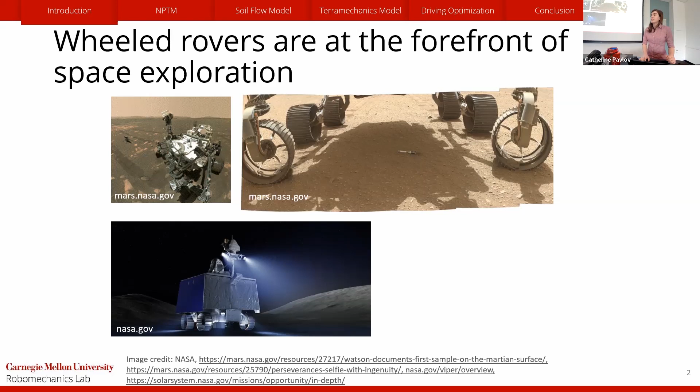You can see here on the lower left is an image of VIPER, the Volatiles Investigating Polar Exploration Rover. This is a rover that will be launching to the lunar surface in 2024, searching for signs of water and other volatiles necessary for a sustained human presence on the moon. So upcoming mission, very cool. And if we look to the past, wheeled rovers have really driven a lot of our scientific discoveries in the solar system. This is a picture of either Spirit or Opportunity. They're identical, so I can't really tell you which one it is. And they have driven a huge amount of our knowledge about how the solar system works.

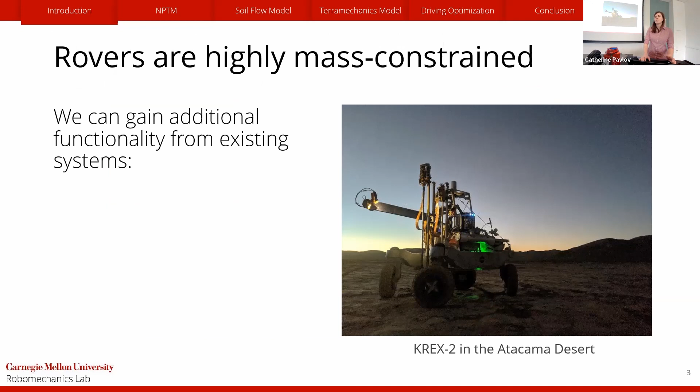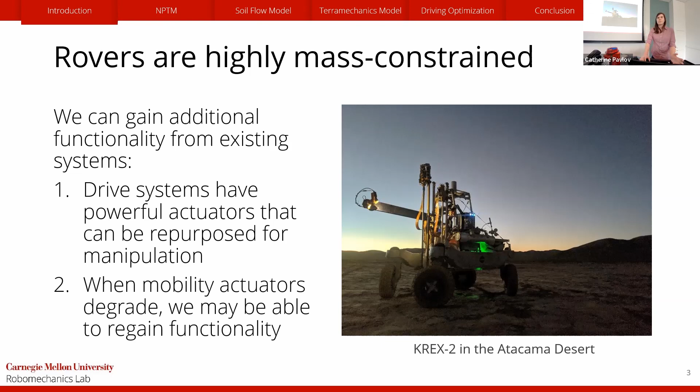One of the drawbacks to any space mission, but especially looking at rovers, is that they're very highly mass constrained. So if we can get any kind of additional functionality out of existing systems on those rovers without building new mechanisms, that's extremely useful. There's 2 key areas that we can look at here. The first is that our drive systems often have very powerful actuators used for locomotion that we can repurpose for manipulation. The second is looking at how we can get back capability when we lose some. When mobility actuators degrade, we might be able to regain some amount of functionality, because generally they'll have more capability to provide force than is explicitly needed for driving. And if we change how we're controlling things, we can get some back in the case of damage.

So let's talk more about manipulation. First up, I'm talking about non-prehensile manipulation today. Non-prehensile just means non-grasping. It doesn't require a dedicated manipulator necessarily. So it can involve pushing, rolling, or any other non-force closure contact. You can see in the video here, this was taken by Dr. Jennifer King, who did some previous work using the frame of a rover to push around cardboard boxes. So she's using the rover here to do rearrangement planning, doing non-prehensile manipulation through pushing. So this is an example of what non-prehensile can look like applied to a rover.

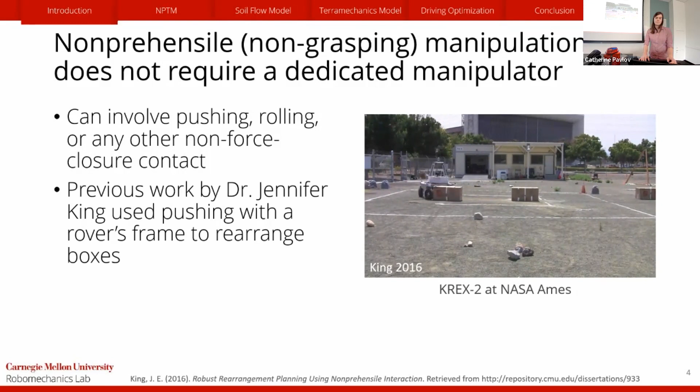Mars rovers have also used their wheels to interact with terrain already. Both Spirit and Opportunity created small trenches or wheel scuffs in the dirt, but this was done in a largely ad hoc manner, where the rover's manipulation was hand tested and pre-planned and done in a small amount, but it was just trial and error on Earth, replicate on hardware in situ. There wasn't a huge amount of planning. If we wanted to do larger scale manipulations, we need to move beyond that.

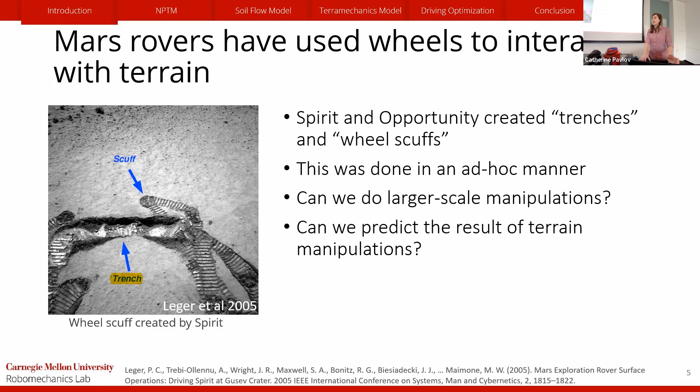So this is a pretty small wheel scuff. You can see it's less than the length of the rover body, just based on the width of the wheel. And it's good for looking at a specific sampling location. But if we wanted to sample over larger regions, it's maybe not as helpful. We'd also like to be able to predict the results of these terrain manipulations. Rather than just dragging a wheel and seeing what happens, we might want to dig to a specified depth, or at least know that we're not going to get stuck when we do this.

If we're looking at applying this to upcoming missions, one to look at in particular is VIPER. The VIPER rover has a 4-wheeled active suspension, which is potentially higher risk. Rather than a 6-wheeled passive suspension like Spirit, Opportunity, Curiosity, and Perseverance have, VIPER has only 4 wheels, but each of them is able to lift up and down. So we have additional actuation there. So we've got now 12 motors, but if any one of them fails, it's potentially a higher impact because now it's impacting a quarter of our thrust-giving wheels rather than only a 1/6.

We also need to consider that future rovers are going to have longer mission durations. For example, the NASA Decadal survey called for Endurance-A, a mission that will have a rover traverse 1,000 kilometers on a lunar surface. For context, the longest a rover has driven is Opportunity, which went under 50 kilometers in 14 years. So going from 50 kilometers to 1,000 kilometers is going to require a paradigm shift in how we think about rover mobility. And as a part of that, we're going to need to plan for failure. We can't just say, we'll drive as far as we want, we'll design this thing to last for 90 days, and if it goes longer, great, if it dies, whatever. We really need to bake into our mission planning what we are going to do when something breaks, because it's going to happen over a distance that long.

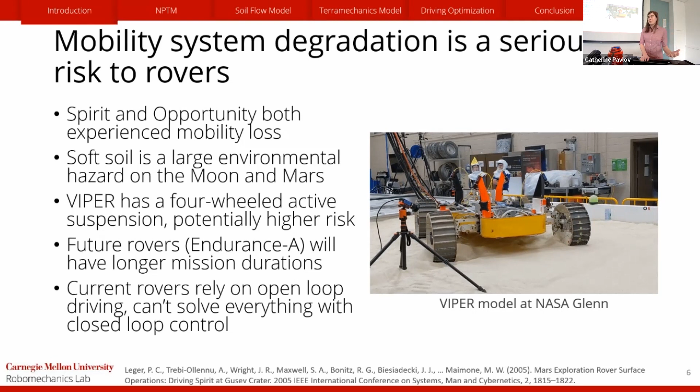Additionally, current rovers rely on open loop driving. Both Curiosity and Perseverance only do visual odometry about every meter to check whether they're slipping or not. So they're not doing online visual odometry, which means that you need to have good, reliable open loop driving strategies. You can't just close the loop to fix everything. Having good open loop driving strategies requires a strong knowledge of your wheel terrain interaction. So failure is a really big problem. Can we do anything about it? The good news is yes.

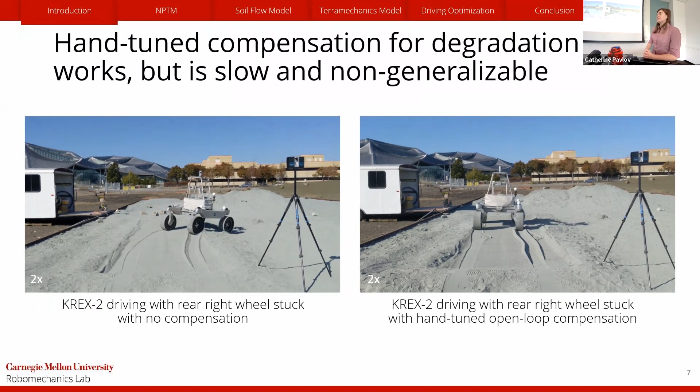This video here is one I took of KREX-2 at the NASA Ames Roverscape. Here I have fixed K-REX's rear right wheel so that it's non-rotating, as if it had a rock jam or something else causing it to not rotate. You can see on the left that without any compensation, it pretty quickly veers off the track and goes into a ditch. This is a problem. However, with hand-tuned compensation, we're able to drive relatively straight over prepared terrain. But this is hand-tuned, and it took me a couple days of hand-tuning to get this to work reliably.

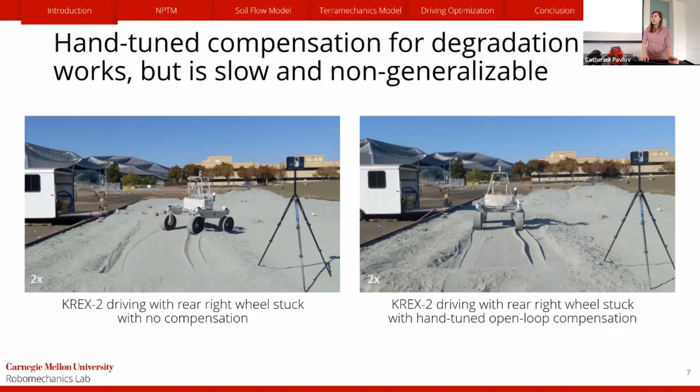So that's not a great solution if we want to be driving thousands of kilometers while we're doing this and potentially encountering different types of terrain where we would have to retune every time we change our soil properties.

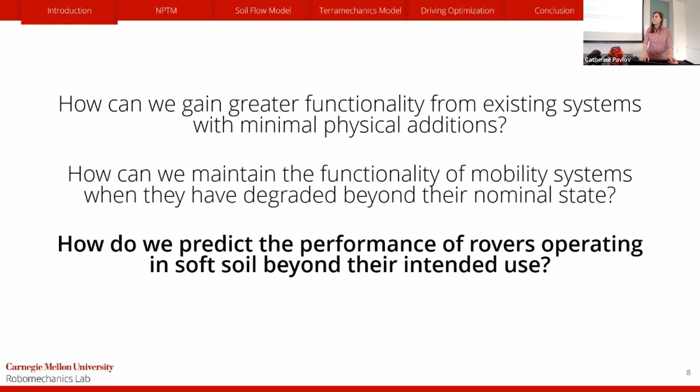So with all this in mind, there's a couple of questions we're going to ask. First up, how can we gain greater functionality from existing systems with minimal physical additions? And we also want to know, how can we maintain the functionality of mobility systems when they've degraded beyond their nominal state? And these two questions really lead into, how do we predict the performance of rovers operating in soft soil beyond their intended use? Whether that's because we have forced them to be beyond their intended use, or they've degraded and the environment is forcing it upon us.

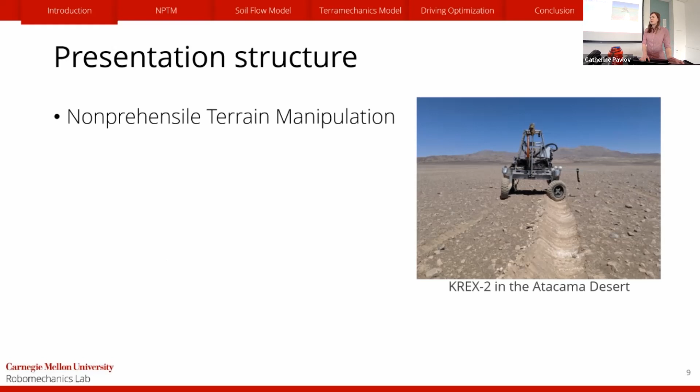So here's what we're going to talk about today. First up, I'll go over non-prehensile terrain manipulation a little more, talk about what that is as a concept and why we care about it and what we're going to do with it here. Then I'll go into a model that I built that describes the soil flow around the wheel of a rover that is driving under off-nominal or nominal conditions. And then I'll talk about a Terramechanics model that I've made that's able to handle off-nominal conditions that no existing Terramechanics models could previously handle.

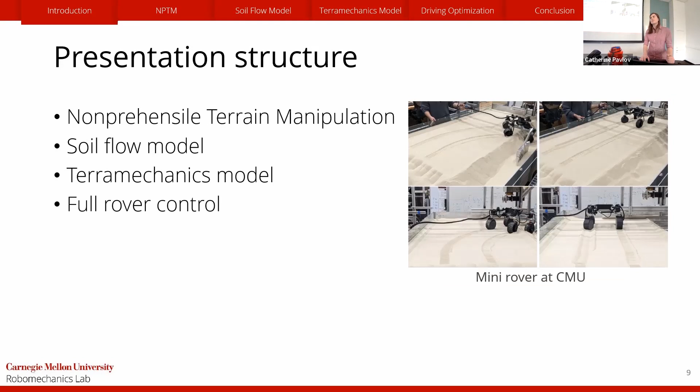Then I'll talk about how we put those all together and develop full rover control strategies for both open loop and closed loop control of driving during off-nominal conditions. And finally, I'll talk about what we've learned so far and what is up next for this area of research.

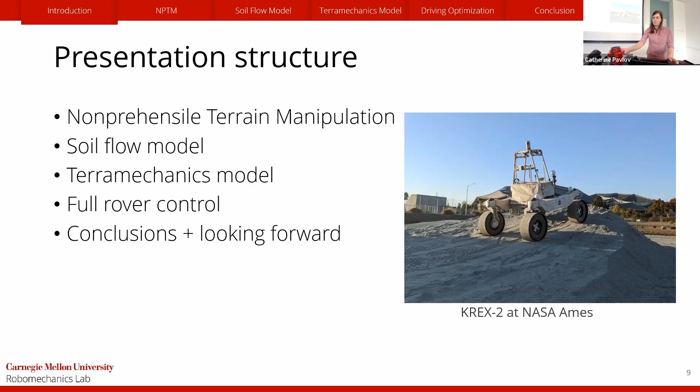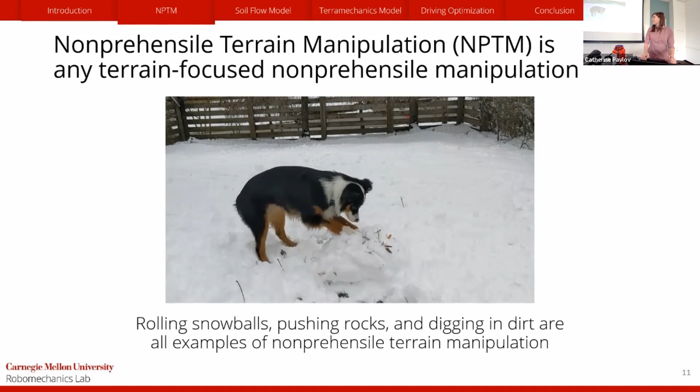First up, let's talk more about non-prehensile terrain manipulation. So non-prehensile terrain manipulation is any terrain-focused non-prehensile manipulation. Could be rolling snowballs like what Millie is doing here, or pushing rocks around or digging in the dirt. Rovers have a variety of uses for non-prehensile terrain manipulation. The first one, and the one I'll talk the most about today, is science, subsurface sampling. It could also use it for mobility.

So you could imagine on a mixed mobility mission that's perhaps longer duration, having more capable but larger rovers carve paths for smaller robots to perform monitoring or other tasks where they might repeatedly be covering an area, and then let the big rover go off and do its important things farther away. Could also envision having the rover alter terrain for itself.

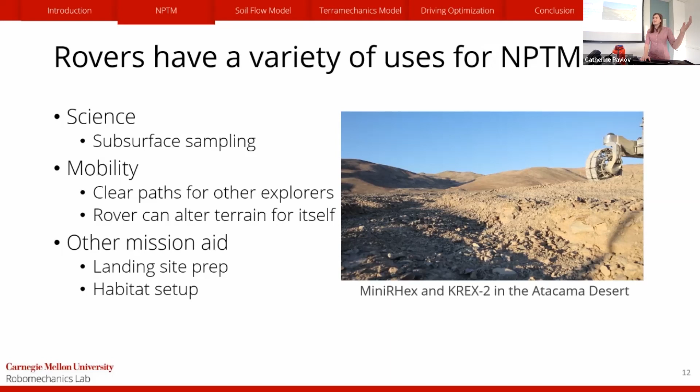We can also use non-prehensile terrain manipulation for other forms of mission aid, such as possibly landing site preparation. Maybe for Mars sample return, we'll have a landing vehicle coming down onto the Martian surface, and we could have a rover prepare the area nearby to where it's been caching samples to make a more level and smooth surface. Could also envision using rovers to help set up habitats for astronauts, perhaps digging trenches to lay cables in as part of habitat construction.

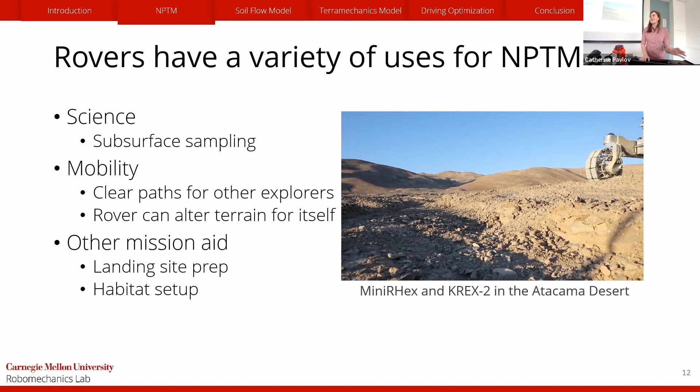So there's a lot of potential things we can do with non-prehensile terrain manipulation, and there's a lot more things to cover than I can do in one PhD. So we're going to focus in on one specific action and zero in on this. We're looking mostly at the trenching action here, where we use a wheel to dig, because it's very useful and it has pretty minimal requirements, so it's achievable. The purpose of trenching is either site mobility, site prep, science, and there's possible extensions to mobility as well, especially science looking at doing subsurface sampling.

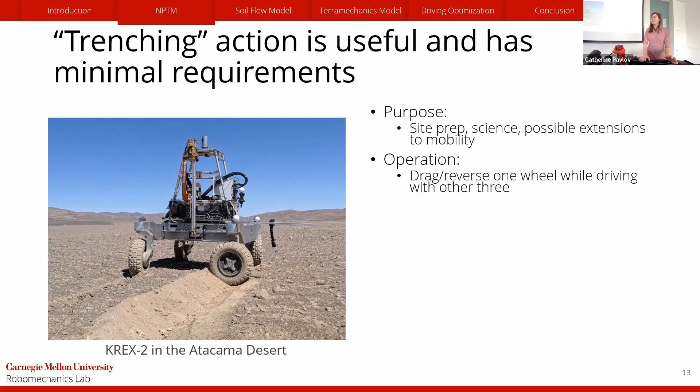The robot operation, or what we need to do physically to control the robot to do this, is to drag, reverse, or spin one wheel at an odd speed while driving with the other three. Our rovers are all capable of doing that. And some potential mission scenarios this can apply to are accessing lower levels of strata for sampling, preparing sites for humans or other robots, such as by digging a trench to lay wires in, like I mentioned earlier.

And our requirements are things that most rovers meet. So we need wheels with steer and drive motors. All of our upcoming and current rovers have that. For sensing, we'd like to have visual depth and orientation sensing to confirm that we've done things correctly. But if we have good enough open loop, we don't need to have these in real time. We'd just like to have them present on our rover. And for the terrain, we want friable soil and small rocks. So soft soil or small rocks. And this describes a large portion of both the lunar and Martian surfaces.

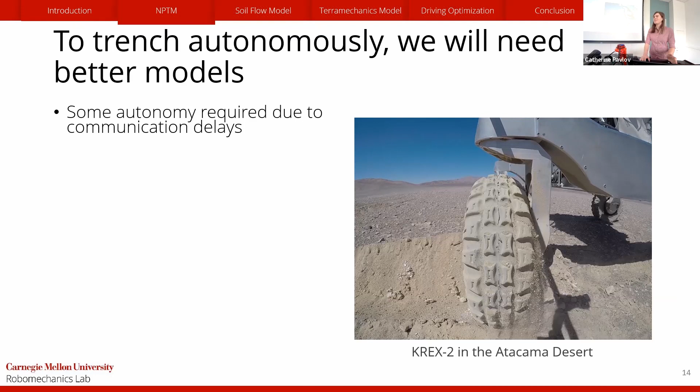We really don't want to get stuck. If we get our car stuck here on Earth, that's okay. You call a friend and they pull you out. If you get your rover stuck on Mars, there's no one to call and pull you out. And it's often end of mission. We don't want to do that.

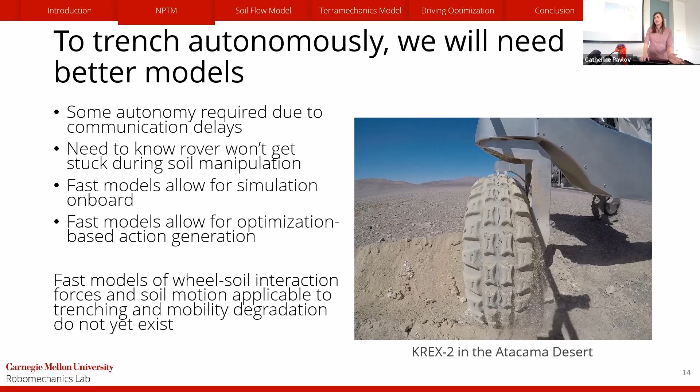We'd also like to have relatively fast models, either so that we can do onboard simulation or so that we can use optimization methods to generate our actions for doing trench digging. However, fast models of wheel-soil interaction, both the forces and the soil motion, that are applicable to both trenching and mobility degradation don't yet exist. So now I will talk about how I made them. First up, we're going to talk about the soil flow model.

There's a couple options in the literature for modeling soil flow. Discrete element models, which use many small particles and model the individual movement of the particles, are pretty common if you want visually realistic simulation. These are extremely slow, and you still need to know a lot about what your particles are like. Finite element methods are a little bit faster. They tend to be mesh-based methods. It's going to be faster, but still pretty slow. Hybrid DEM and FEM methods exist that sort of balance the two in terms of realism and speed.

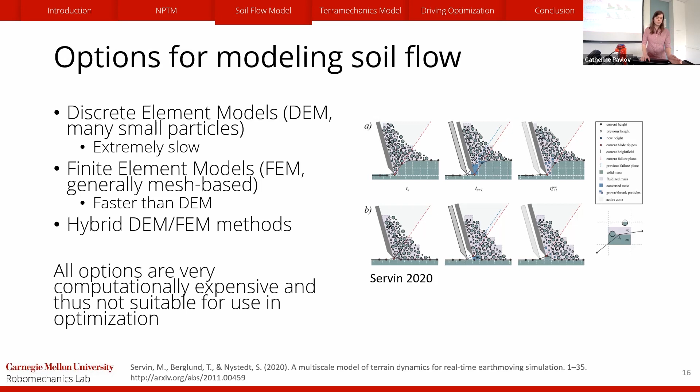But all of these are way more computationally expensive than we'd like, and not something that's really suitable for use in an optimization or in really good online simulation. We also don't care that much about where every grain of sand goes. We want a general overall picture of what the soil looks like. So with that in mind, I developed a 2D closed form model of soil flow based on soil mechanics that describes a couple of distinct trench shapes that we observed by driving a wheel through soil.

This model is based on some key assumptions. We're assuming that all soil moves from the front to the back of the wheel without compaction. That's going to vary by terrain. And if there is some compaction, that will change our model accuracy a bit. And we're going to assume that the soil comes to rest at its angle of repose, the angle of repose being the maximum slope angle for a soft soil. So if you pile up sand and let it fall down, it's going to fall to the same angle every time. That's the angle of repose. It's a pretty easy to extract soil property.

So let's go through how the soil flow model works just briefly. So here we're looking at a wheel from behind. First up, we look at where the wheel is interacting with the soil, and we separate the soil into the portions that are touching the wheel rim and the portions that are touching the wheel face. We separate those out. We'll also additionally, from the wheel rim, take out the soil that is getting caught up in the grousers rather than getting pushed along by the wheel rim, and we'll separate that out for now.

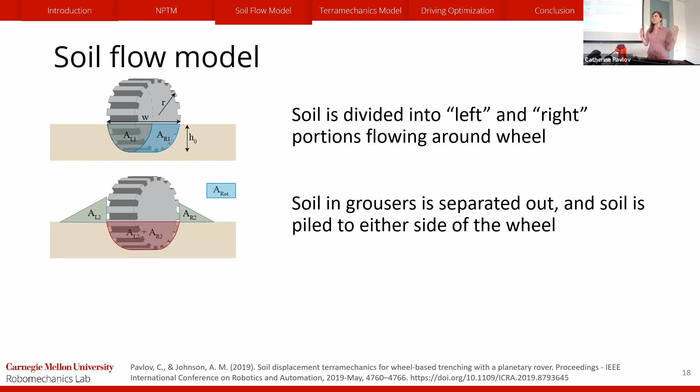We then take the soil that we've had flow around the sides, both around the face and around the wheel rim, and we'll pile it up to either side of the wheel. And then we let those piles reflow back into the trench. We've still got our soil that's separated in the grousers held out for now.

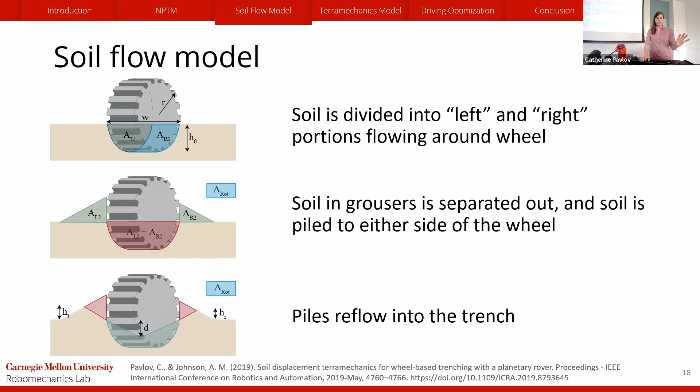Once we've reflowed those piles, we'll check and see if the resultant depth of our trench is physically possible. It may be that in order for us to have a pointy trench, we need to have a trench that's deeper than the bottom of our wheel. That's non-physical. If that's the case, we know that the bottom of our trench is flat, and we recalculate. And then once we've done that, we take the soil that was deposited in the grousers and we dump it back on the trench where it forms a step or a flat bottom.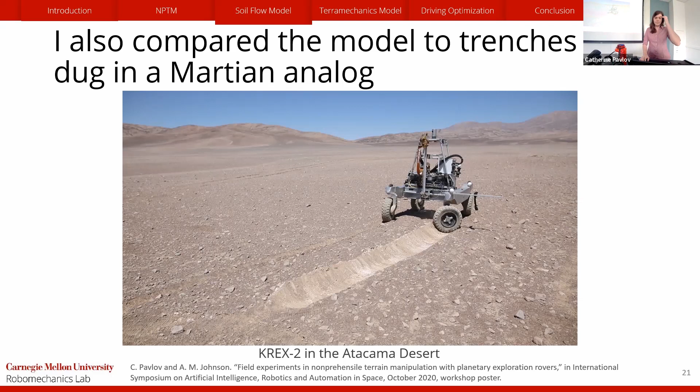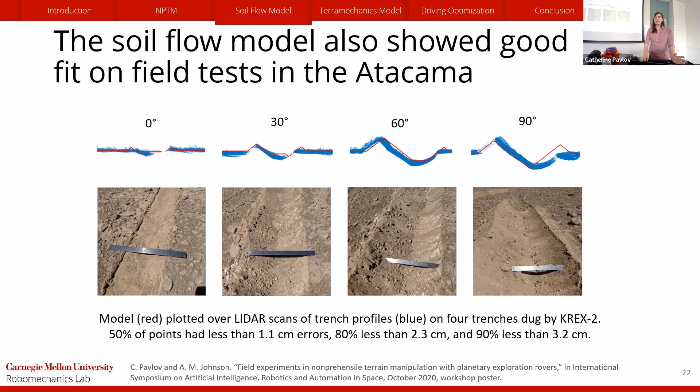So the model also worked well at predicting the shape of these trenches in the field. We were able to measure the soil angle of repose in situ by digging with the wheel and measuring the slope of the resultant soil pile. And based on that, we were able to predict pretty well what the shape of the trench would be. So this works both in the lab and in the real world, and it's extremely fast because it's closed form. But now we need to know about what our wheel-soil interaction forces are. So now we're going to talk about terramechanics.

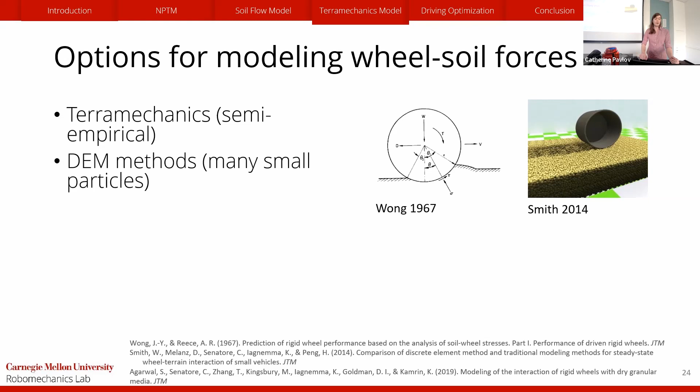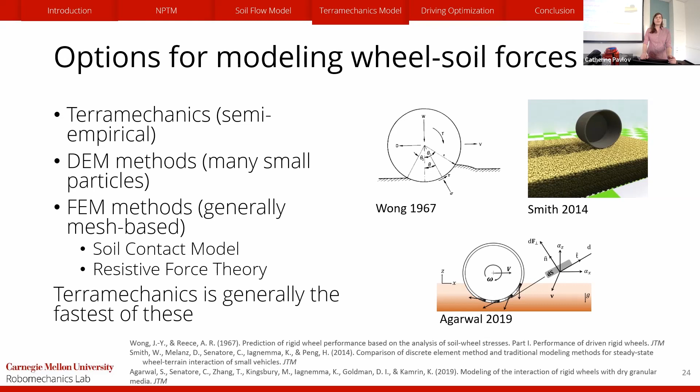There's a couple of options for modeling wheel-soil interaction forces. First up, the one I'll talk most about today is terramechanics, which is a semi-empirical model that uses soil mechanics informed methods to look at the stress distributions under a wheel. There's also, again, discrete element methods like we had for our soil flow modeling, where you look at many small particles, and finite element methods, which are generally mesh-based. These include methods such as soil contact model and resistive force theory, which is inspired by fluid dynamics. Terramechanics is generally the fastest of these, given that we're not simulating individual elements.

So let's talk more about terramechanics. Terramechanics models give forces on the wheel for a specified driving state most of the time. How do we define that driving state? First up, we're going to look at the slip ratio, which I briefly mentioned earlier. The slip ratio is going to describe how our wheel is moving relative to the soil by looking at its rotational speed compared to its translational speed. So we'll be in positive slip if our wheel is spinning faster than it's moving forward, and in negative slip or skid if it's spinning slower than it's moving forward.

Zero slip is the point where the wheel is rotating with its rim speed at the same speed as its translational speed. So when you're driving your car on the freeway, you're at zero slip. When you slam on the brakes, you're in skid or negative slip. And if you're at the stoplight trying to race the person next to you and you slam on the accelerator and your tires spin before you start getting traction, you'll be in positive slip there.

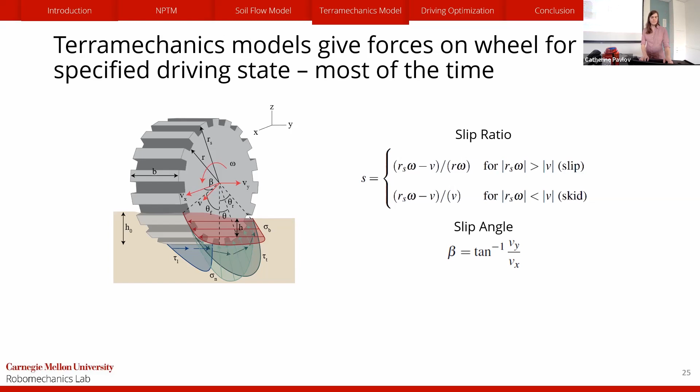We're also going to talk about the slip angle, which is the angle of the wheel relative to the direction of travel. If our rover is driving straight, that's just going to be the angle of the wheel relative to the frame. So for a given slip ratio S and slip angle beta and some known applied load, we can find the stresses on the wheel surfaces and integrate to find the net forces and how far that wheel is sinking into the soil at steady state.

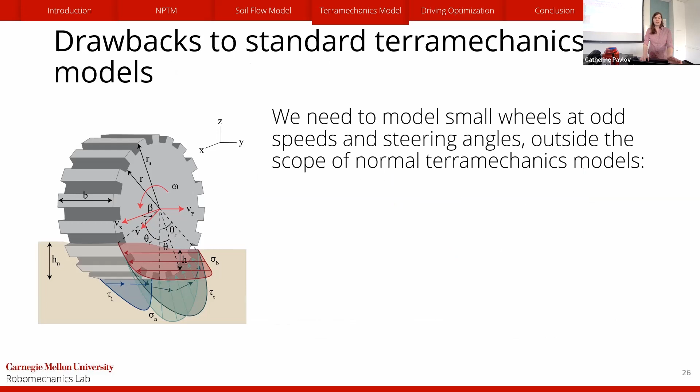It is important to note that terramechanics models are generally steady state. However, there are some drawbacks to the standard models, which I'll be addressing. First up, we need to model small wheels that are at odd speeds and odd steering angles, which is all outside of the scope of normal terramechanics models. So because terramechanics is semi-empirical and we have many tuned variables, it really matters what region we've tested our models in and what region we've verified our models in when we're looking at the state space.

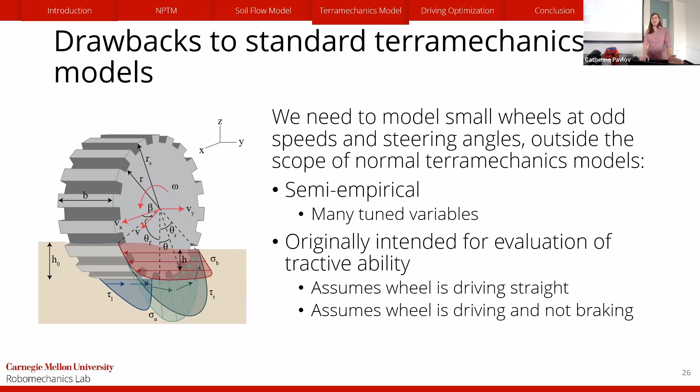Because these models are intended originally for the evaluation of tractive ability, they tend to assume that the wheel is driving straight and usually that it's driving and not braking. So we're in slip, not skid. There has been some exploration of skid, but not as much as slip. And there haven't been any that connect skid and non-zero steering angles. So I've built a new terramechanics model that fixes these problems.

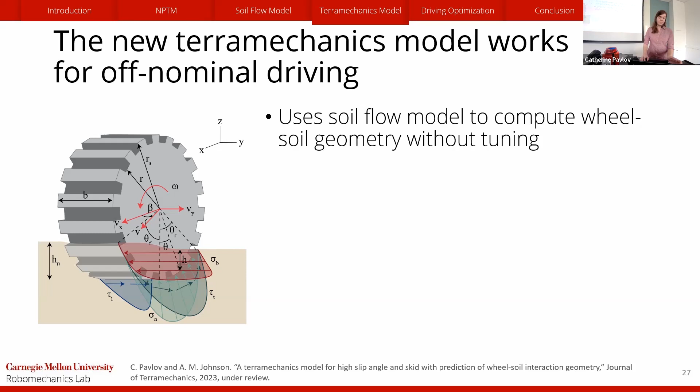First up, one thing we do is we use the soil flow model to compute some of our wheel-soil interaction geometry without tuning. So we're able to use that soil flow model to eliminate some tuning variables, which makes us able to apply it to more conditions without as much tuning. I also combined models that handle slip angles and skid conditions and tested them. No one's ever done this before. There are no papers in the literature that look at skid with a steering angle.

I also modeled the forces on the wheel's face using soil cutting theory. There are existing models that look at steering angle, but the most popular one has a math mistake, so we did it a slightly different way. And I also looked at how to predict tuning variables for different slip angles so that we can take this model and continuously apply it to any wheel state. So I'll talk briefly about how we can use the soil flow model to get our wheel-soil contact geometry.

So here we can see the wheel viewed from the front. And you can see we've got our soil surface here. And there's a couple of angles here that are going to define how our wheel is in contact with the soil. So we define our contact points by their angular location on the wheel's surface, where theta F is our front angle. It's largely determined by the sinkage. And theta R is our rear angle, which is where the back of the wheel loses contact with the terrain.

And historically, that value has been either just straight up measured or tuned based on trying to fit the model better. However, we can do better. We've got a soil flow model. So here you can see the wheel viewed from behind now. And we've already executed our soil flow model to get this profile. And what we can do is look at the part of the profile that's in contact with the wheel's rear rim and take a weighted average to find out what angle the wheel is contacting the soil at.

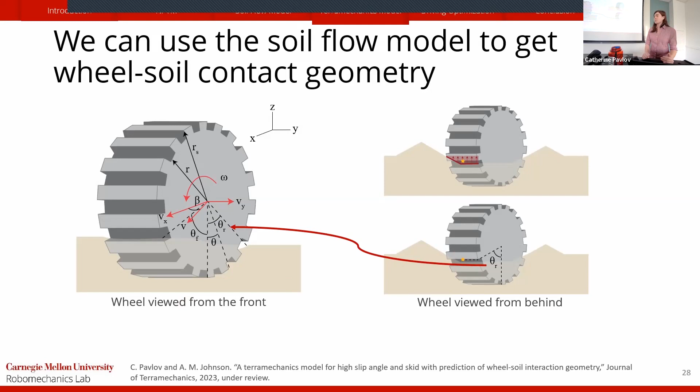And we can directly extract that angle. And so now we don't have to tune this exit angle. We don't have to tune our wheel-soil contact geometry, and we can just directly predict it and use that in our model. And because the soil flow model is closed form, this isn't going to add to our computation time.

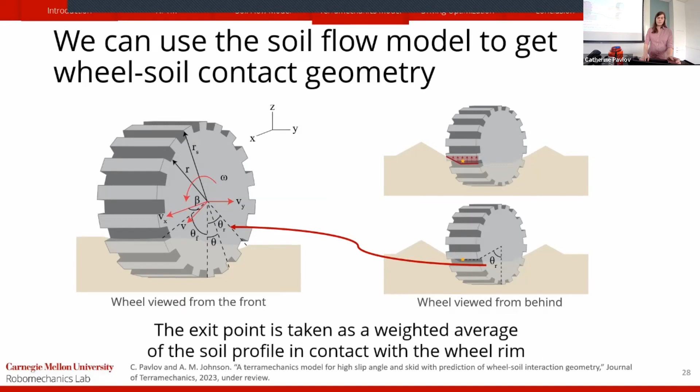So we built this great model. How do we know it works? So due to the pandemic, I was unable to go borrow a terramechanics test bed to test this, and I built one myself. So in this test bed, the wheel is driven at a selected travel speed, rotational speed, and angle. The wheel is free to translate vertically, and we measure the sinkage. So we've got a constant load applied to it in the form of a constant weight with free vertical translation.

There's a force torque sensor mounted above the wheel, which will be a little easier to see on the next slide. And we're using the same soil as we used for both our soil flow model tests, and that we'll use in some tests later as well.

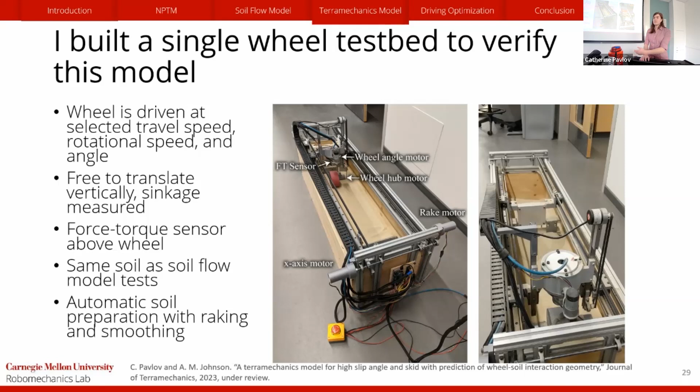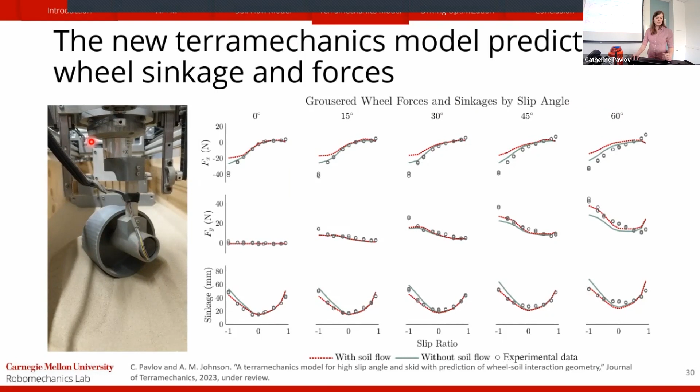And this also has automatic soil preparation with both raking and smoothing of the soil surface, so we have an even and consistently prepared soil bed. You can see on the left here is a wheel doing a run. Mounted above it is the force torque sensor here that's measuring our vertical load, so we know how much force is really being applied, and also measuring our forward and sideways forces.

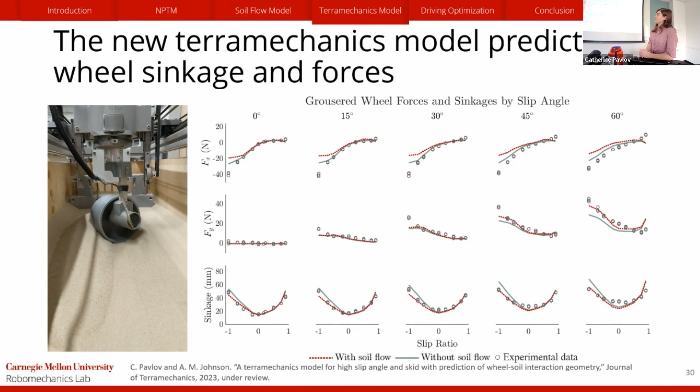And you can see that it is digging into the soil pretty deeply here, driving at a relatively high slip angle. As you can see on the right, we had pretty good fit from the Terramechanics model for predicting both the X and Y forces on the wheel, as well as predicting the wheel's sinkage. I've shown here the same model, both with the soil flow prediction of the exit angle and without the soil flow prediction of the exit angle, using the classic method of just tuning that exit angle to make the forces fit as best as possible.

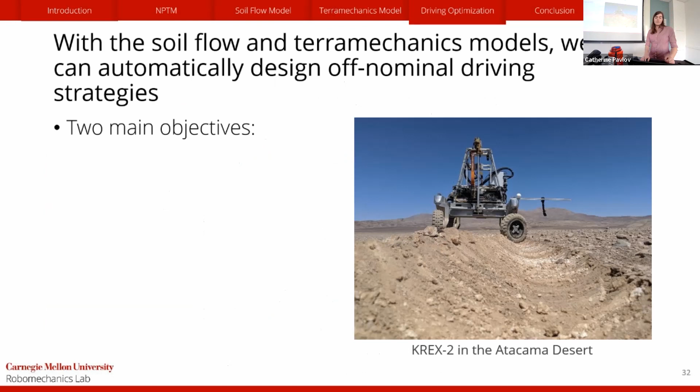So now we've got these models, what can we do with them? So with the soil flow and Terramechanics models, we now have the tools that we need to automatically design off-nominal driving strategies. There's two main objectives. One is to generate trenching actions automatically, and the other is to compensate for wheel failure. We can use the same approach to both problems.

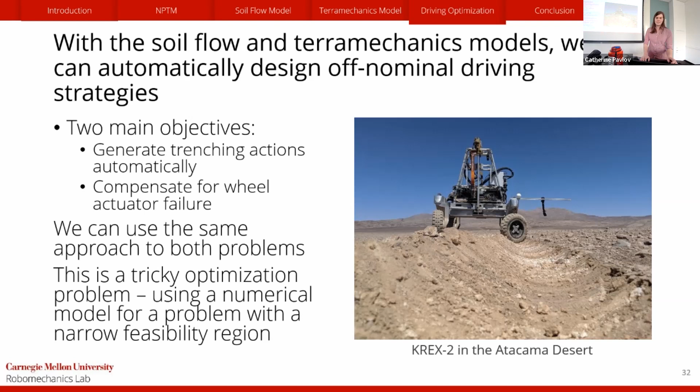I will say that setting this up as an optimization problem is tricky. We're using a numerical model for a problem with a pretty narrow feasibility region. I won't get into the dirty details, but suffice to say, it's more than just fmincon solve this problem for me. So here's how we would use an optimization-based method to generate trench actions. Our decision variables are going to be the rotational speed, the slip angle, the vertical load, and the sinkage for every wheel independently. So we've got 16 variables.

And our constraints, first off, are going to be that our forces and moments on the entire rover sum to 0. So we want our rover to be driving at steady state because we want this to be an open loop action that we can perform and have the rover drive at a constant heading. So we need all the forces and moments to balance to zero. We also want to make sure that the vertical load matches the force predicted from the selected sinkage.

Note that I've had the vertical load and the sinkage be both decision variables. This allows us to avoid having to do an internal loop in our Terramechanics model to perform finding of the sinkage. Normally we do that by having binary search over sinkage until our applied load matches our predicted vertical load. But if you do that in an optimization, you're going to have a bad time. So we avoid doing that entirely and set that as a constraint and let the optimization do the sinkage finding for us.

Then we want to think about what we want our trench to look like. So for the trench that I wanted to dig, I wanted to have a clean edge, which is to say I wanted the soil piled all to one side and completely transported from one side to the other so that we have an area where no soil has reflowed into the trench. And I wanted some minimum dimensions. So I wanted the trench to be at least 2.5 centimeters deep so we could get a look at it.

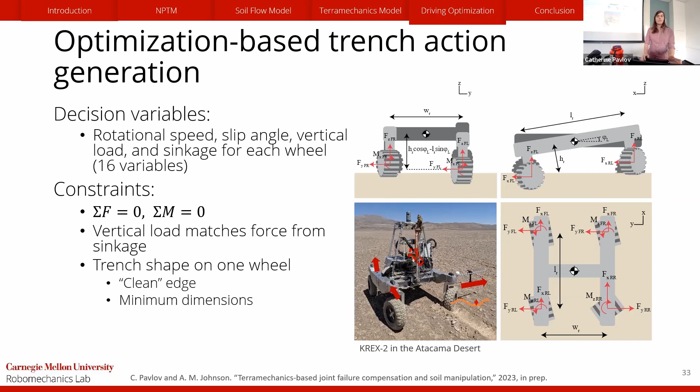The cost function, since this is an optimization, is going to be trying to minimize our power consumption. There are, of course, an infinite number of possible ways to solve for force balance and solve these constraints, and a lot of them are going to be absolutely bonkers and have the wheels spinning crazy fast and working against each other. By minimizing the power consumption, we can counter that. So that'll generate us a feed-forward, or open-loop, action.

If we want to develop closed-loop control, we can do a very similar approach. So our decision variables, costs, and constraints are going to be the same, except that for controlling our yaw angle, we'll offset our yaw moment balance by a small amount. And for controlling our horizontal position, we'll offset the y force balance by a small amount.

You could use the same approach to generate controllers that'll keep you at a constant speed by offsetting the x force, etc. But I focused on those two because I was mostly concerned with how do we drive straight. You then run the optimization separately for each controller, and you subtract out the feed forward driving variables in order to get a steering controller.

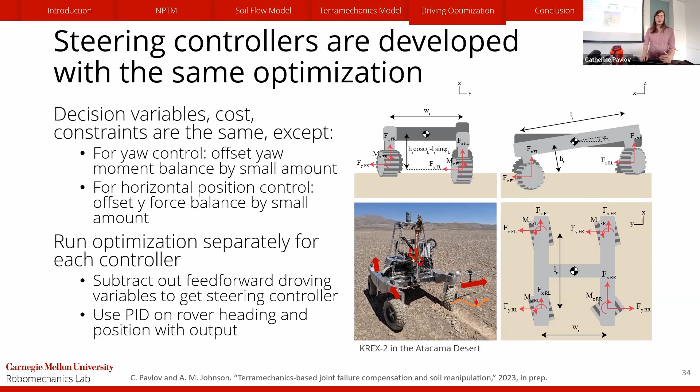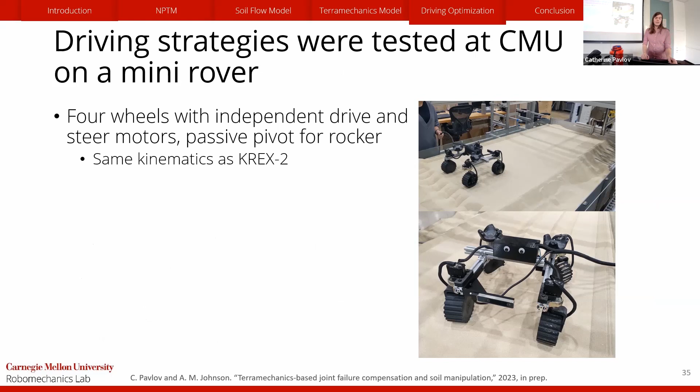You can then use PID on the rover heading and position with output to force your rover to drive straight. So after generating these trenching strategies, I tested them at CMU in one of David Wettergreen's test beds on a mini rover that I built. This rover has 4 wheels with independent drive and steering motors and a passive pivot for the 2 rockers. So it's got the same kinematics as KREX-2.

It's got a RealSense T265 mounted to the front for measuring rover pose. And it's got the same soil preparation and same soil as the Terramechanics and soil flow model tests. We've got about a 1 meter by 2 meter area to work with, so there's room for it to drive. This rover is about the size of a microwave, so it's pretty small compared to KREX-2, which was about the size of a golf cart. This has the same wheels as our Terramechanics tests, which is great because we've tuned our models for them.

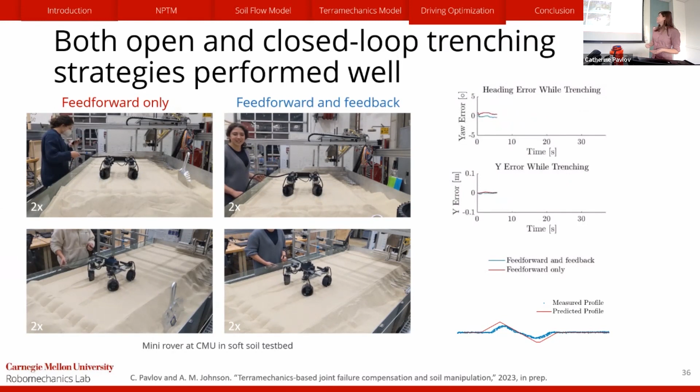So first off, for trenching, our open and closed loop strategies both worked well. You can see on the left, we have our open loop or feed forward only trench digging strategy. And on the right, we have that feed forward term, also with the feedback controls I described in a previous slide. And you can see that for all of these, the rover is driving straight. You can see the yaw error and y error on the right.

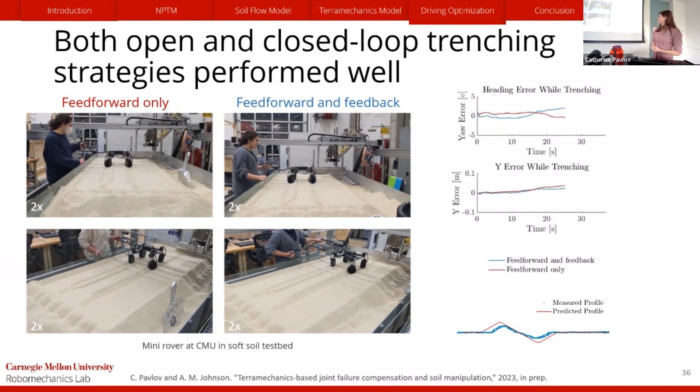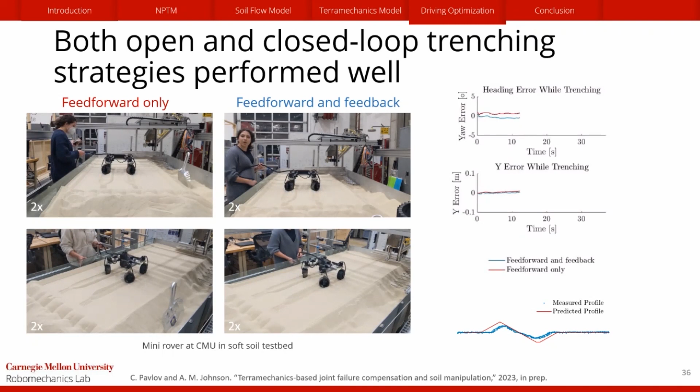They're staying pretty small. Our yaw error is at most like 1 or 2 degrees, and our y error is very small. And you can see on the lower right, the shape of the trench we dug, a laser scan of it compared to the shape we expected. Our sinkage was a little bit lower than predicted, but the overall shape was correct.

All right, we can also use this same optimization strategy to compensate for actuator failure. We're going to have our same decision variables, our rotational speed, our slip angle, our vertical load, and our sinkage for each wheel. So 16 variables again. And the constraints are going to start off the same. We want the same force and moment balance to sum to 0. Once again, we're making the optimization do sinkage finding for us so we can avoid doing that internal loop. But now, instead of having trench constraints, we're going to have our broken actuator constraints.

So I'm going to look at 2 different potential modes of failure here. There are so many ways a rover can break, but I only had time to test 2. So first up, we've got a stuck steering angle, as if the rover's steering joint has gotten stuck in the middle of performing a turn or something. This did happen to Spirit. It got one of its steering motors stuck at an angle. And then we're going to look at a speed limited wheel. So here I'm going to set that the rear right wheel is only able to rotate at most half the speed of its intended travel speed.

Now you could just slow down the whole rover, but let's say we're trying to cover 1,000 kilometers in less than 50 years, and we'd like to go fast. We want to know, can we go fast with this wheel? Maybe it just needs to recirculate lubricant for a bit and we have to run it slower for a bit. Or do we absolutely have to go slower? And once again, we're going to minimize power consumption as our cost.

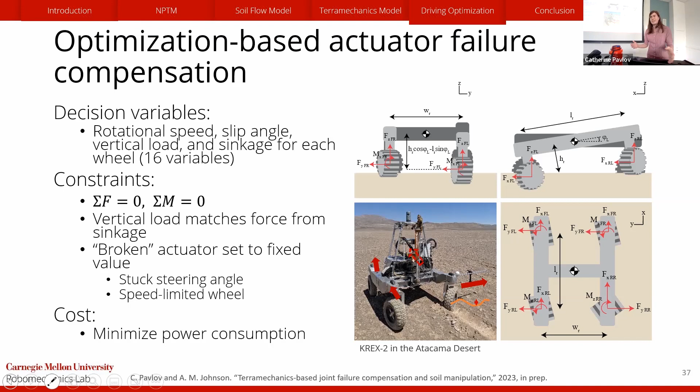You could imagine adding in other constraints as well, such as if you said, oh, we know that doing this kind of thing is going to put a lot of stress on one of the supports for our wheel. You can do things like set constraints limiting forces, internal forces on the rover, etc. I wasn't worried about that here, so I didn't include those, but you absolutely can.

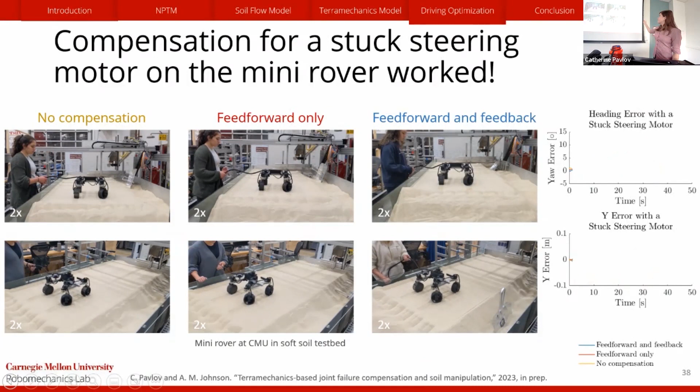So compensation for stuck steering on the mini rover worked. On the left, you can see the rover driving with a stuck steer motor with no compensation. You can see it as the yellow track on the right over here, where it veers way off to the side. In the center, you can see our feed forward only turn, where the rover has far less error in the Y direction. It does have some yaw error now though, so this one's not quite perfect. And with both feed forward and feedback control, we're able to drive completely straight. That's the blue track.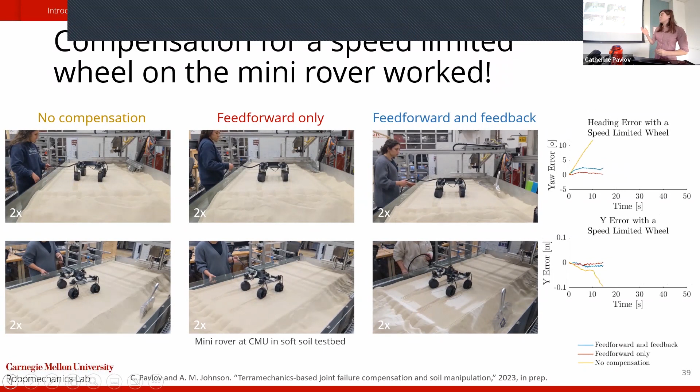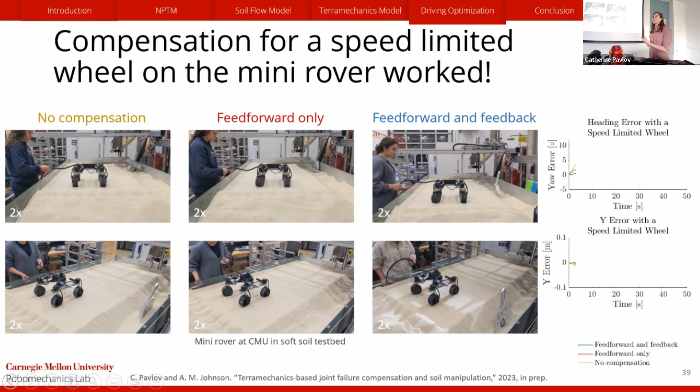Compensation for a wheel with a speed limit on the rear right wheel worked really well as well. You can see here, again, on the left, we have our fully uncompensated rover, and you'll see that it immediately starts turning off to the right, and it's going to end up in the ditch off to the side. Our feed forward only turn, which is the red track, is able to drive completely straight. And our feed forward and feedback control, again, is also able to drive completely straight, which is not surprising given that the feed forward only turn worked. You don't really need feedback control there, but it still works too.

So this tells us about how we can do a single driving strategy. It doesn't tell us as much about our overall mobility. If we want to look at how our overall capabilities have been affected by the loss of a drive motor or steering actuator, how do we do that? So what we've done so far is to do this through testing. So what you can do if you want to look at, say, what regions of slopes can we traverse, is you can do tests where you have your rover attached to a tether and apply a fixed load to that tether and see how the rover is able to drive. So this is drawbar pull testing.

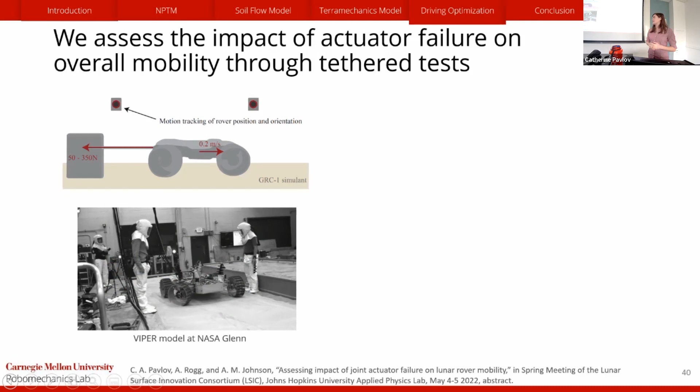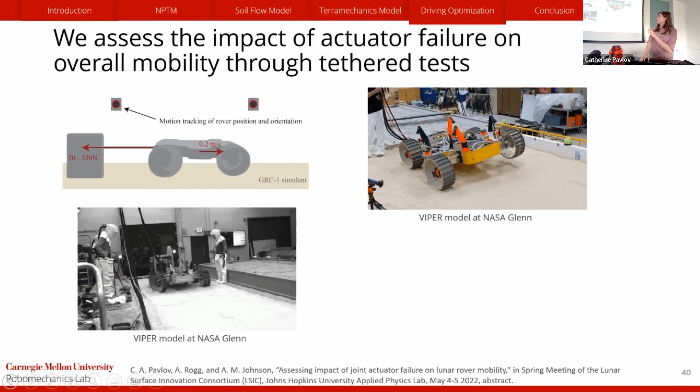So we did some of this with Viper at NASA Glenn. Shout out to Arno, Antoine, and the Viper team for recording this data for me. And so what we do here in this video, you can see the front right steering motor is stuck at about a 30-degree angle, and the rover's driving forwards. And so we can do that and also do free driving tests where we just let the rover drive untethered. Those cables there are just power and communications, not an actual tether.

And then we can look at how much slip gets induced on the rover while it's doing these maneuvers. We can take the applied load to our rover and convert that into an equivalent slope that it would be driving up if it had to pull that much weight, and use that to figure out how much slip gets induced on the rover due to failure of an actuator. However, this is only showing the worst case. If we're doing our failure compensation strategies, we're going to have better mobility than we can see here.

Kathy, can you explain what's happening in the video on the right there? What is the failure mode? I see the wheels in the air, but what is failing? Oh, yeah. That one is a stuck suspension motor where one of the wheels has been raised up. So this is a failure mode that you can see on Viper, but you would probably not see on Curiosity, Perseverance, any of the ones with passive suspension. This is one of the downsides of having an active suspension is you risk this happening. I think that does happen on Opportunity, right? If one of the three wheels on one side of the rover... Oh yeah. Mm-hmm. Over like rough terrain. Yeah.

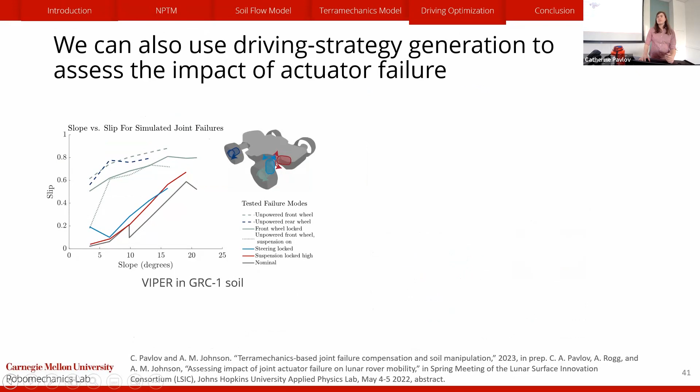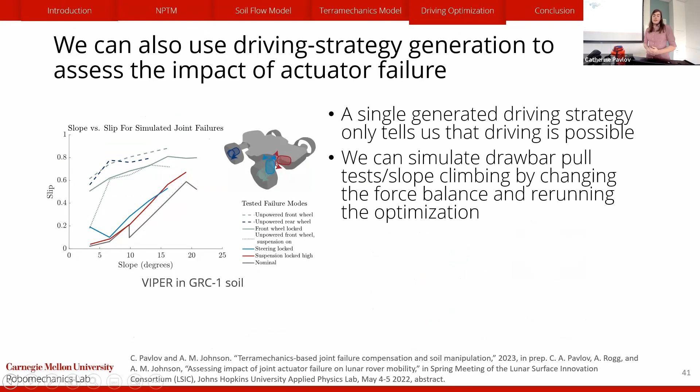Yeah. So we can also use driving strategy generation to assess this kind of impact of actuator failure. So while a single driving strategy only tells us that driving is possible, it doesn't tell us the scope of what's possible. We can simulate doing these drawbar pull tests by changing the force balance on our rover and rerunning the optimization. If we then use those results, we can get operational limits on how we're able to drive our rover with our new affected mobility.

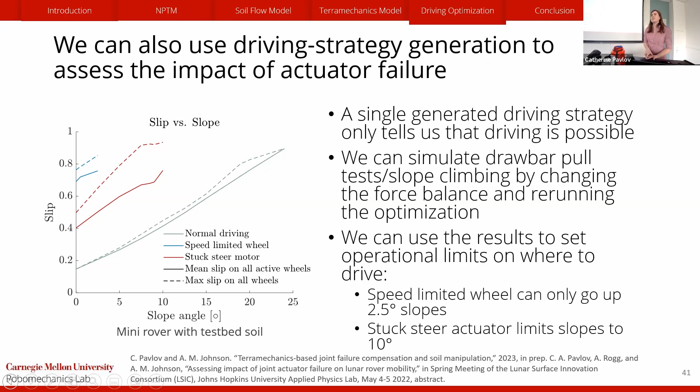So conclusion, let's talk about what we've learned so far. So we can use non-prehensile terrain manipulation to dig trenches while we're driving. We can now model soil flow efficiently and quickly in a way that is suitable for use in other modeling methods and in optimizations. We can also now accurately model terramechanics for off-nominal driving of various forms.

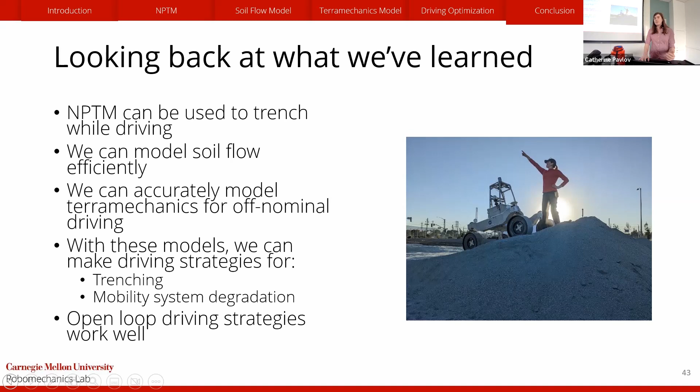And with these models, we can make driving strategies for digging trenches and for dealing with the case of mobility system failure. Our open loop driving strategies also work well, which is great because it means we can use these techniques on rovers as they are now and rovers as they're likely to be in the near future, at least for large flagship missions. So here's what we've done so far, but what's next? This is a really cool area and there's a lot more to do.

Non-prehensile terrain manipulation. We'd like to do more exploration of the different actions we can do and develop them more for rovers. We could also do more with just the trenching action. It has potential applications to steep slope mobility through carving paths or controlling the sinkage of wheels, such as by intentionally sinking wheels to provide anchoring while driving down steep soft slopes, or perhaps controlling the roll of the rover while traversing slopes.

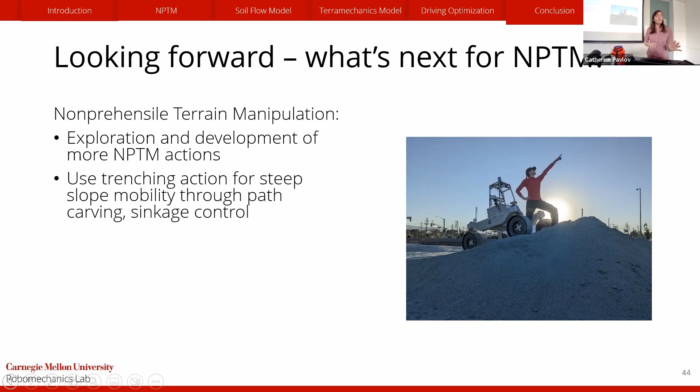We can also go back the other direction and try to design our rovers and wheels for non-prehensile terrain manipulation. So we could imagine running the same optimization, but perhaps where our wheel radius or our rover dimensions are a free variable, and we can optimize those. We also would like to do kinodynamic planning for larger scale terrain manipulations. So we can do stuff like search for shallow subsurface ice on the lunar surface through explicit paths, or even do terraforming on the Martian surface.

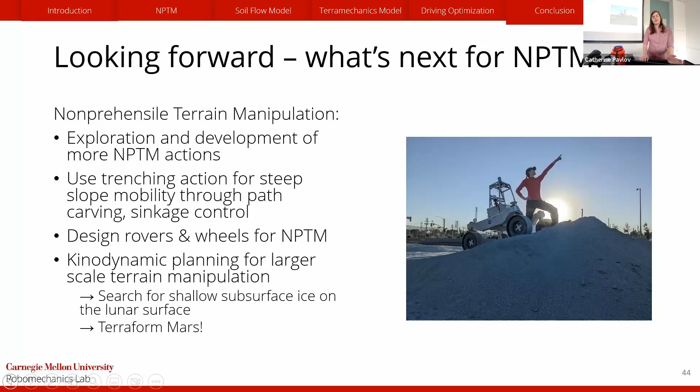What's next for mobility degradation? So we'd like to expand to more soils and wheels. I've been looking primarily at a mini rover, and we want to look at tuning our models for larger rovers before deploying them in space. Also like to look at more rover architectures. So as I've mentioned, a number of different rovers have different kinematics, and we could also imagine expanding this to legged robots and other different forms of locomotion as well.

I'd also like to expand to more failure modes. I've tested 2 so far. There are a lot more ways that rovers can fail.